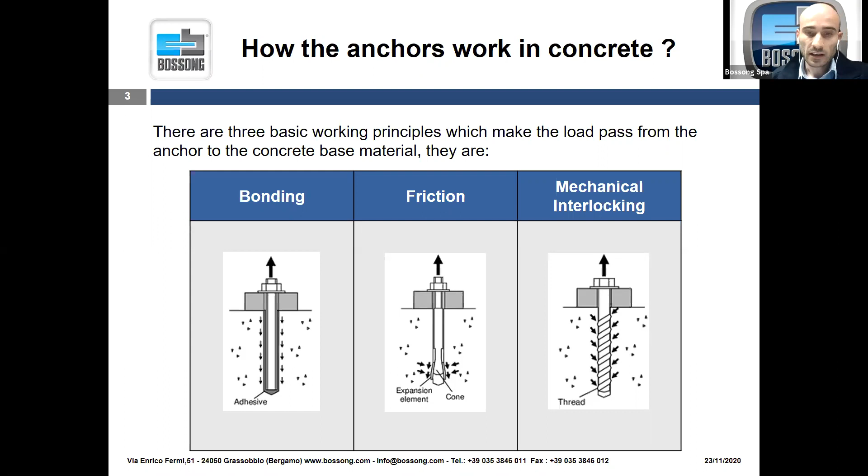So, how do anchors work in concrete? To understand how anchors work in this type of base material, you can see this slide. It's quite easy, and the main principles of working are bonding, friction, and mechanical interlocking. To give you a simple overview, you can find each type of mechanism correlated to the type of product that you can find in the market.

Bonding means that bond adhesion is created between the rod and the base material, so basically you have a chemical anchor with a threaded rod or a rebar. The friction mechanism is typically used by sleeve anchors or through bolt anchors: the expansion of the cone creates friction between the cone itself and the concrete surface. The other type of mechanism is mechanical interlocking: the particular geometry of the steel element guarantees an interlocking between the concrete and the thread.

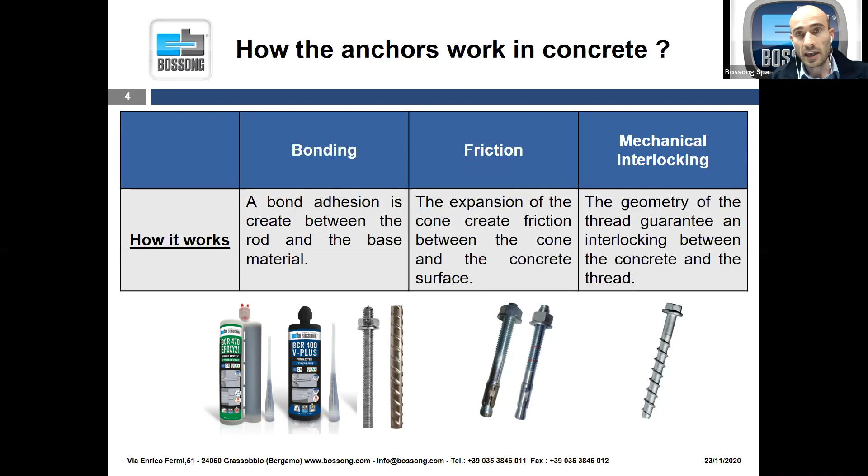The other really important step is the design principle of anchors in concrete. Within the world of fixing, two theories behind anchors in concrete are well known, depending on the type of installation. The first is the standard fixing theory according to the concrete capacity design, CCD. The other one is the reinforced concrete theory.

In the first one, the main application is the fixing of a steel element, like a metal plate, to a concrete substrate. In the second one, the reinforced concrete theory, the target is to connect a new reinforced concrete element to an existing reinforced concrete element. For this purpose, typically only bonded anchors are used.

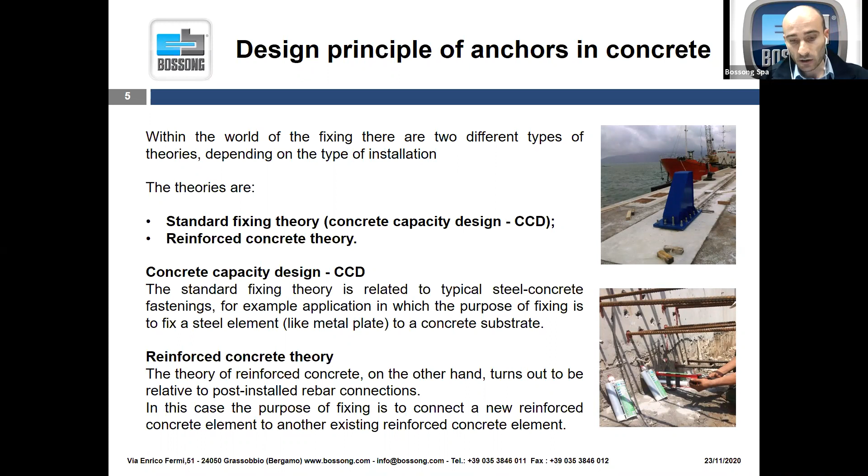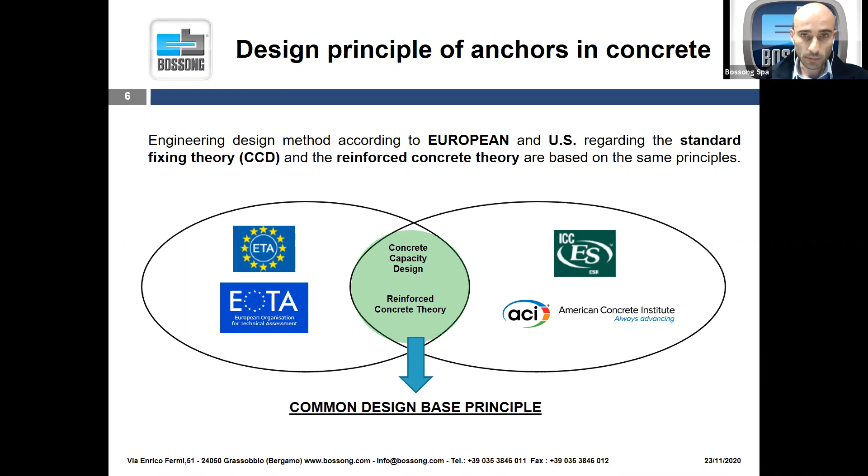European and US systems today represent the maximum knowledge on the behavior of post-installed anchors in concrete. You can see in this slide the two different systems: the European system under EOTA and the US system under ACI. But it's really important to define at the beginning that both are based on common design principles, for the concrete capacity design and also for the reinforced concrete theory.

You can see an overview of the European design principles. In the concrete capacity design, the tensile capacity of the concrete is directly used in order to transfer the load inside the concrete. In the reinforced concrete theory, the anchor is designed as a lap splice. This picture comes from the European guideline and the European design document.

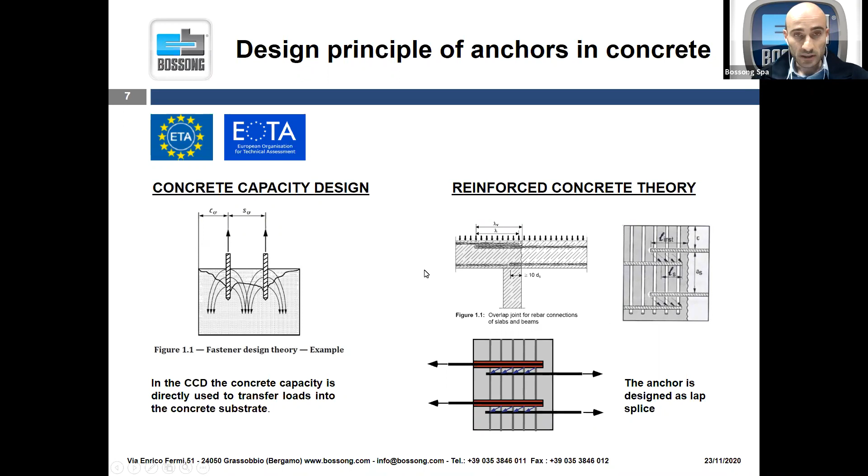As you can see, the same picture and the same principle are used for the US system. In the concrete capacity design, the tensile capacity of the concrete is directly used. You probably know the base principle of the concrete cone failure. And for reinforced concrete theory, the post-installed rebars are designed as splice anchors.

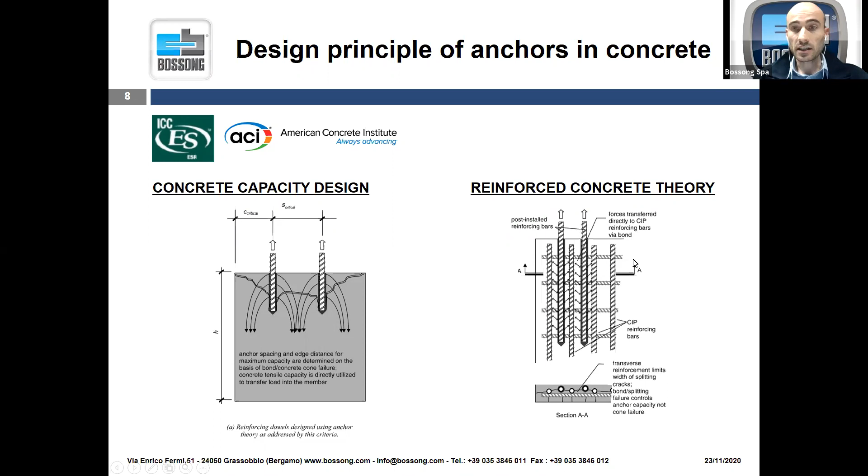Regarding qualification, in Europe the qualification of anchors in concrete is under the EOTA system, the European Organisation for Technical Assessment. This organization, thanks also to the participation of industry in Europe, produced the EAD guidelines. EAD means European Assessment Document, and inside this guideline producers in Europe can find all the rules to follow in order to qualify an anchor, mechanical or bonded, in concrete.

There are a lot of EADs; you can find them on the EOTA website, but the really important EADs today are the following. EAD 330499 is for static and seismic qualification of bonded anchors. EAD 330087 is static and fire qualification for post-installed rebar connections. Another one for post-installed rebar connections relative to seismic qualification is 331522. For mechanical anchors, we have 330232. And we also have EOTA Technical Report 049 regarding seismic qualification for mechanical anchors.

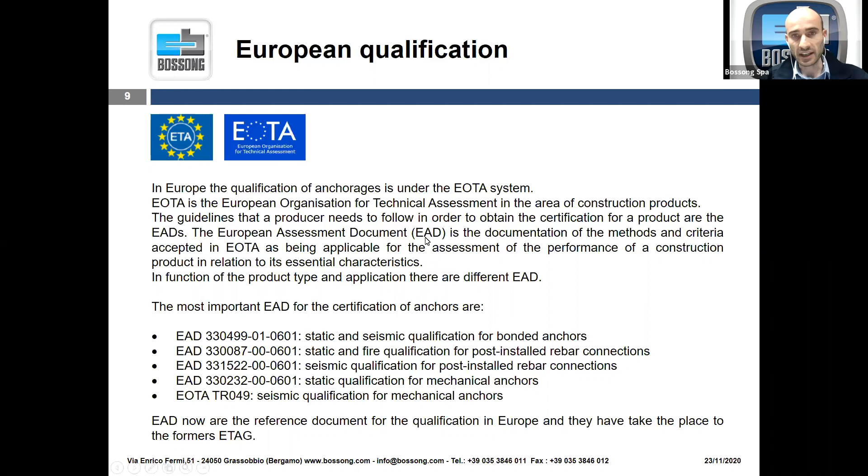In the US, the qualification is under the ACI, the American Concrete Institute. The ICC-ES is the International Code Council Evaluation Service, which reviews and certifies products, components, methods, and materials to assure they meet the requirements of the guidelines.

The guidelines to follow in order to obtain certification for anchors in the US are ACI 355 and AC308. The first one, ACI 355.2, is relative to the static and seismic qualification of post-installed mechanical anchors in concrete. For bonded, adhesive anchors, the guideline is 355.4. And AC308 is the acceptance criteria for post-installed adhesive anchors in concrete elements for PIR, post-installed rebar connections.

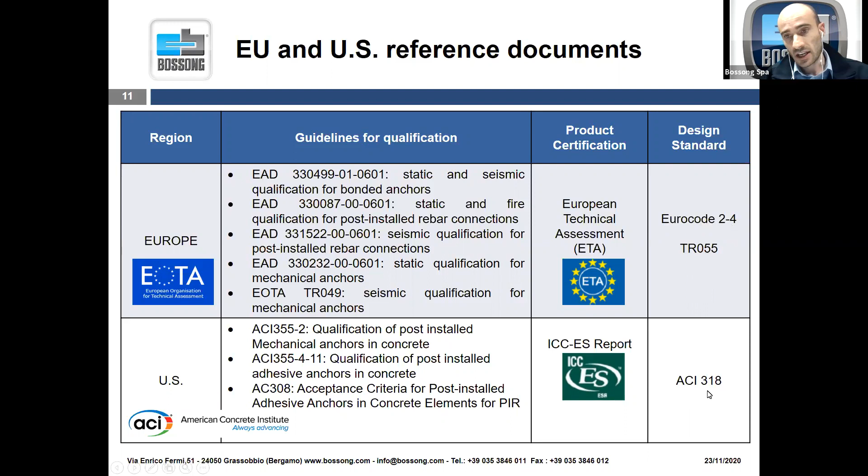I hope that this slide is useful for you. It's just a summary table of the main documents relating to the European and US systems. If you want to go in depth into these documents, you can find them on the website, and you can find the certification of the product, and also some documents and research regarding the design standard, which in Europe is the Eurocode 2-4 and also the European Technical Report 055, and in the US, the design system is ACI 318.

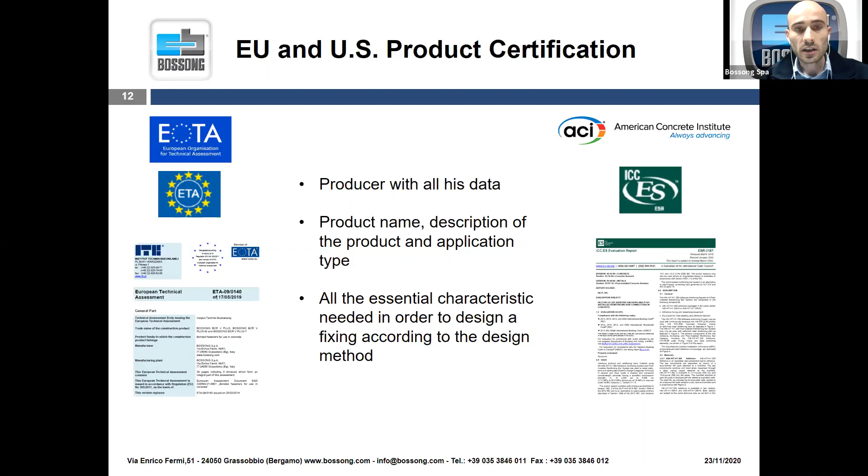About the certification, in Europe we have the ETA, the European Technical Assessment. In the US, the product certification is the ICC-ES evaluation report. Both documents include the technical performance of an anchor product. Inside you can find data about the producer, the product name, description of the product, the application, the intended use, the essential characteristics, and the performance. So it is the document used by the designer and by the subcontractor to understand the level of performance of the product.

An important topic regarding the European and US systems is seismic qualification. Today it is a very discussed and important topic, and on the web you can find a lot of research, dissertations, and opinions. Let me say some brief notes about it. In the US system, in 2001, the ACI 355 document included, at the beginning, the seismic qualification for post-installed anchors in concrete, and then they revised this document in the following years. Today they have only one test protocol.

Instead, in Europe, seismic qualification was introduced only in 2013. The first document was the ETAG Annex E. Then ETAG Annex E was renamed EOTA TR 049. And now EOTA TR 049 will be incorporated into the specific EAD for bonded and mechanical anchors. Today in Europe, for seismic, we have two test protocols: test protocol C1, less severe, mainly for non-structural applications, and the new protocol C2, which is more stringent and dedicated to structural connections.

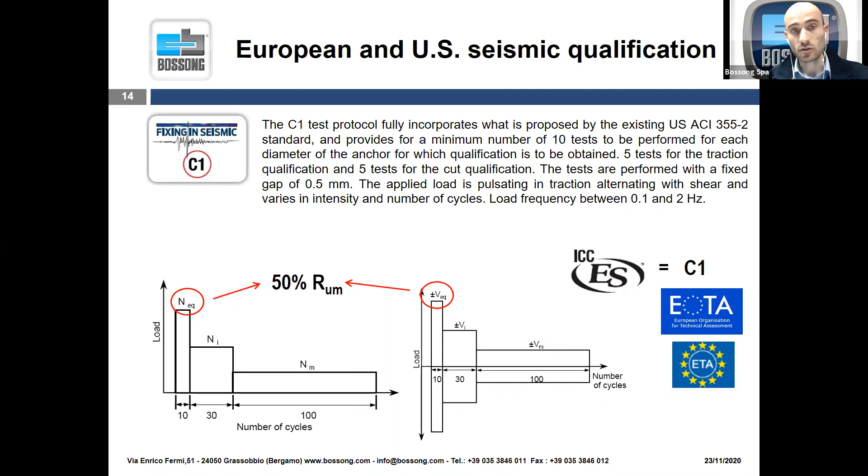Basically, the C1 test protocol fully incorporates what is proposed in the ACI 355 standard. So you have at least 10 tests for each diameter, 5 tests in tension and 5 tests in shear. The tests are performed with a fixed crack width in the concrete equal to 0.5 millimeters. So this protocol is exactly the same as the protocol used in the USA. The European guideline is based on the same protocol as the US system. So C1 is exactly the same.

But after a lot of study and research in Europe, we decided to insert a more stringent protocol, C2. As you can see, instead of 10, you have at least 30 tests per diameter, and the tests are performed in cracks with a maximum width of 0.8 millimeters. So this protocol is really more demanding on the anchor, and the C2 protocol adds extra safety for extreme seismic events, and it's generally used for buildings of high importance.

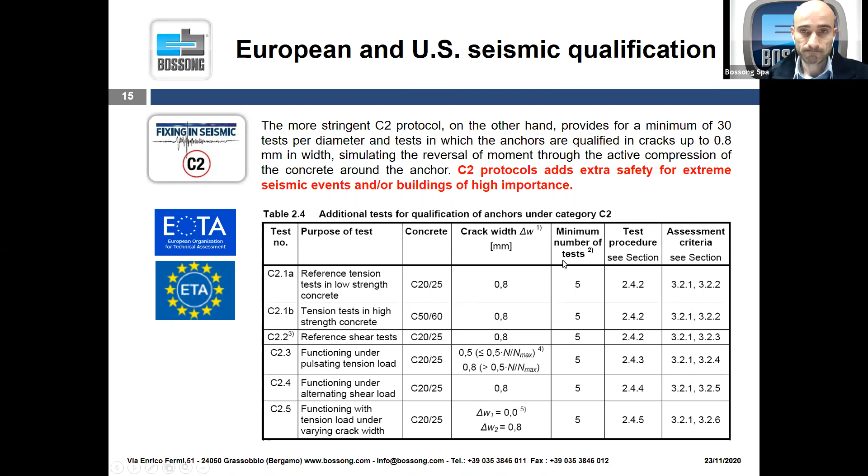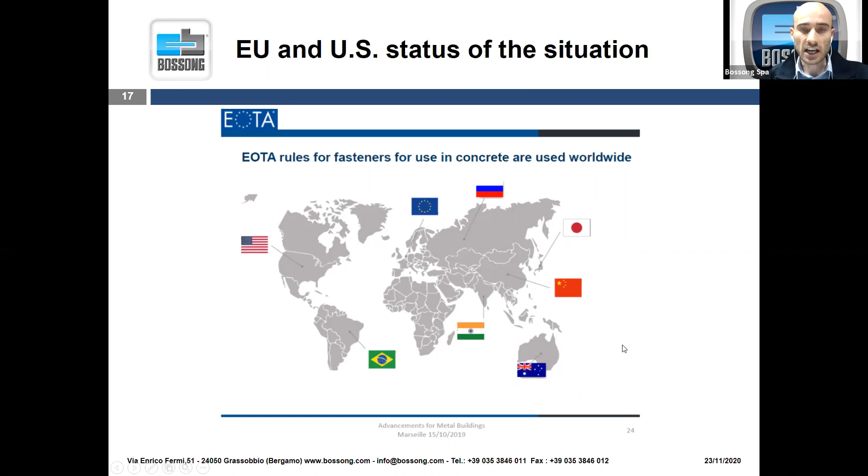The seismic design is quite the same, but the difference is the protocol: protocol C1 is really the same, but protocol C2 in Europe is really different, more severe, and adds extra safety. As proof of this similarity, in the last year, EOTA and ICC-ES posted articles explaining the similarity between the two certifications. And as I told you before, these important organizations expressed their will to collaborate in order to align all the technical specifications and to allow the free use of both certifications around the world.